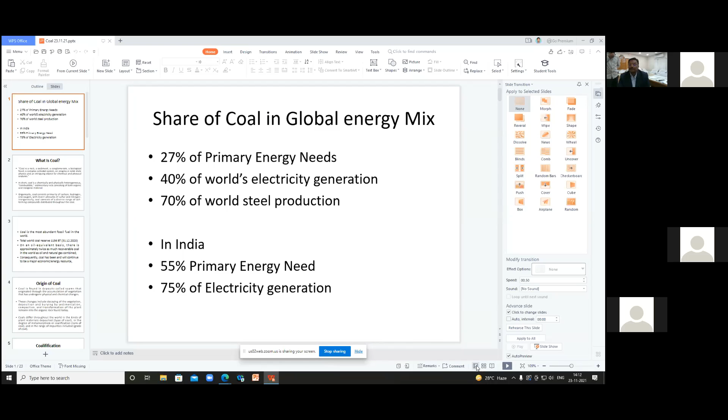With due apologies, am I audible and is the screen shared? Yes, sir, should I proceed now? Yes, sir. Shivang? Yes, sir. Okay, sir, it's taken a lot of time due to connectivity issues. Okay.

So we are to discuss in the next 1 hour regarding coal. Just a month ago, you might have heard in the national media that there was a scarcity or criticality in coal supplies, and many cities would go under blackout. Although that was not true, there was no crisis, but there was stock at the mines, not at the pithead power plants.

The main contribution for that was the rise in international coal prices, as well as the last 1.5 years of COVID-19 pandemic situation. Thermal power plants were not getting their due revenues, and they decided to maintain a lower stock position. Suddenly, when demand went up, the coal supplies from the mines to the pithead power plants took time until that gap was resolved.

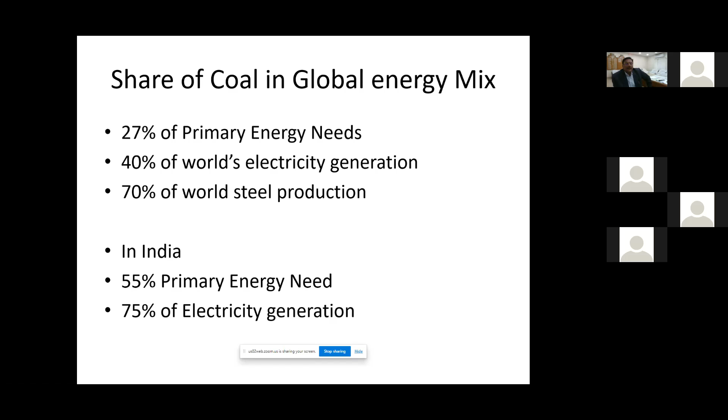If you see the Indian perspective, 55% of the primary energy need of the nation is met by coal, and the total thermal electricity generation share is about 75% of the total electricity generated in the country. And if I may add lignite to this, it accounts for around 79%.

Now, just a brief background about coal. Basically, it is a chemically and physically heterogeneous combustible sedimentary rock, found below the earth's crust, which we mine basically by two systems: underground mining or open cast mining. Organically, it consists of carbon, hydrogen, and oxygen, and very lesser amounts of sulfur and nitrogen.

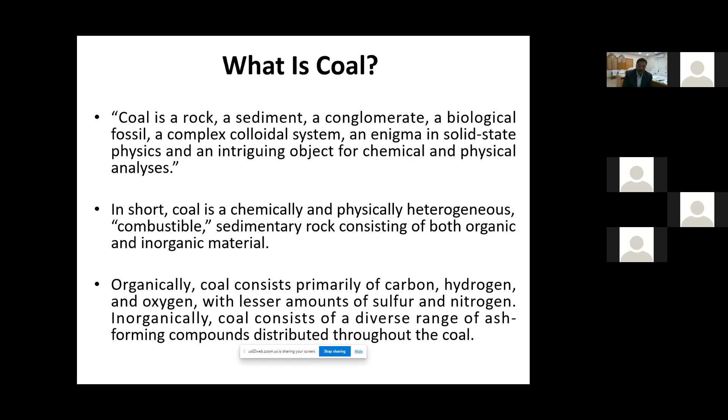It is the most abundant fossil fuel in the world, and the total world coal reserves as of 31st December is around 1156 billion tons, out of which 319 or 320 billion tons is the Indian coal reserve. On an oil equivalent basis, coal represents approximately twice as much recoverable energy in the world presently than oil and natural gas combined. So in perspective of the reserves available and its cost, coal has been and will continue to be a major economic and energy resource.

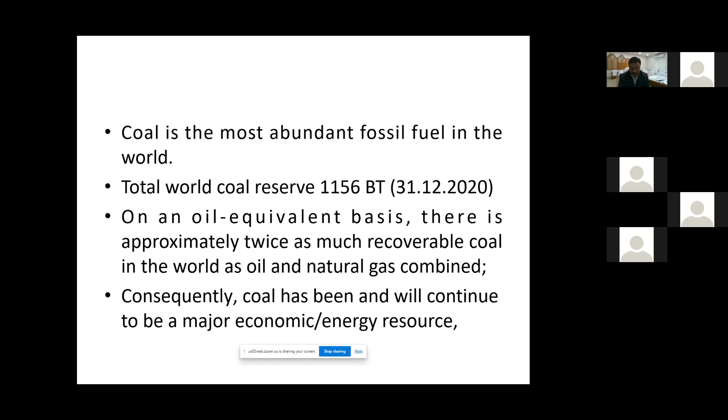As I said, it is found down deep below the earth's crust in the form of seams, which formed over a million years back due to decay of vegetation, and which has undergone physical and chemical changes. It differs throughout the world in kinds of plant materials which got deposited, and has been differently classified in different countries according to the rank of the coal and according to the range of impurities included, which we call the grade of coal.

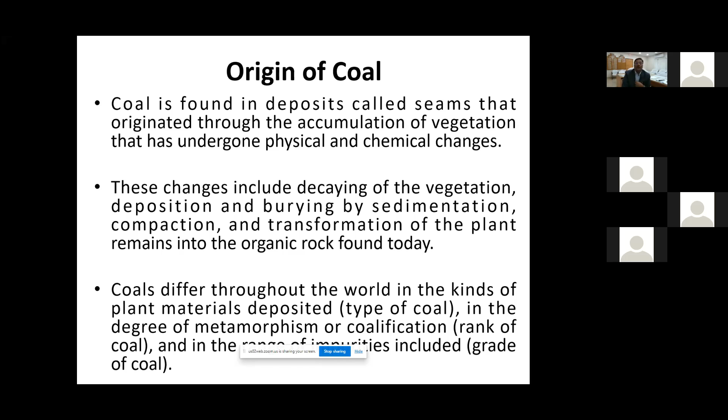The coalification process, in simple terms, is shown in this slide - the geochemical process that transforms plants into coal is called the coalification process. The initial step is in the form of peat. Over years, it gets converted into lignite, sub-bituminous, bituminous, and anthracite. Anthracite is the highest grade coal with higher percentage of carbon.

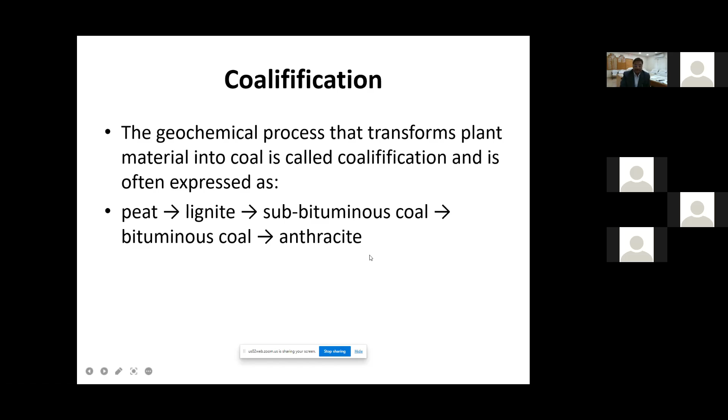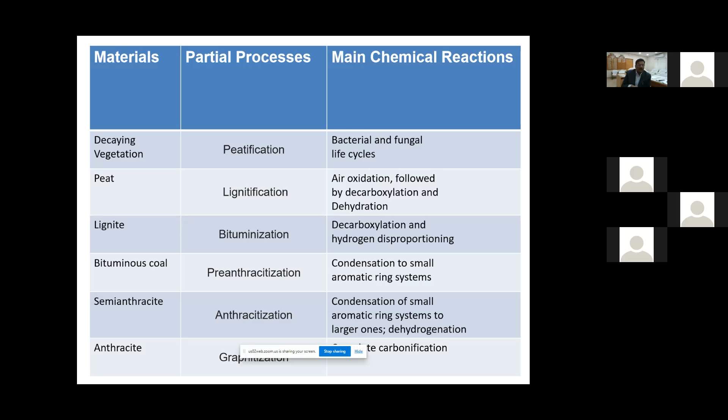This table shows the process of formation of high quality coal right from vegetation up to anthracite. The process name is there, and the main chemical reactions which the coal undergoes is shown in the third column. This is basically to know what you can expect as a byproduct or as flue gas in thermal power plants, or as a residual or slag in boilers - so just a brief idea so one can assimilate what we get in the flue gas or in the slag when we burn coal.

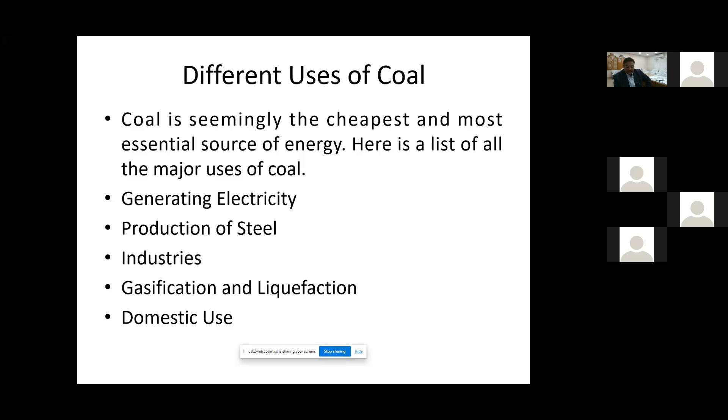What are the different uses of coal? Basically, world over, it is used in generating electricity, production of steel - coke plants world over are used for manufacturing of coke used in steel plants, industries which use it as a source of heat or energy like cement, fertilizers, etc., and in gasification and liquefaction, converting directly from solid to gaseous state. The syngas we use is normally a source of energy further, or liquids also. And in domestic use, over the years, it has gone down, but previously it used to hold a major share.

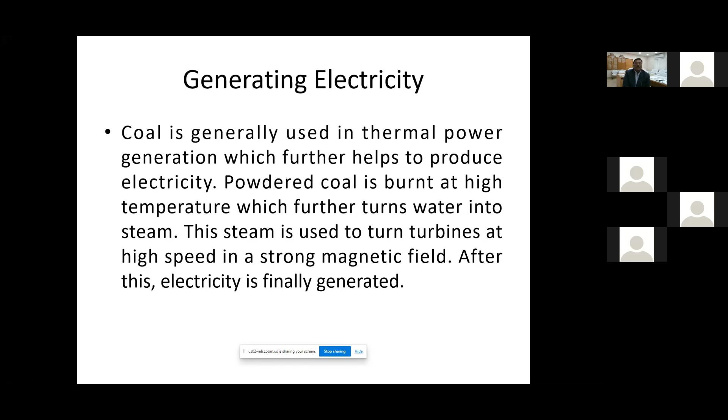Generating electricity, in simple words, is used in thermal power generation which helps produce electricity. It is burnt at high temperature, which turns water into steam, and this steam is used to rotate the turbines at high speeds in a strong magnetic field - just a basic idea of how coal gets converted into electricity.

For production of steel, coal is used indirectly to make steel. The coal is baked in furnaces, which we call coke oven plants. Once this is formed, manufacturers use coal coke to smelt iron ore into iron and make steel.

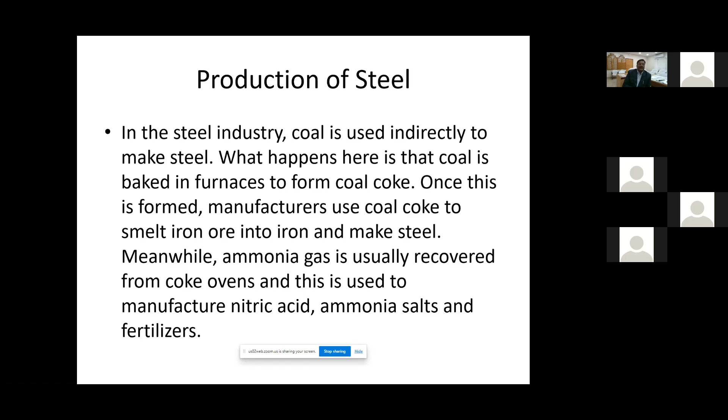Other industries are cement, paper, aluminum, chemical, and pharma industry. Coal provides numerous raw materials like benzol, coal tar, sulfate of ammonia, creosote, etc. to the chemical industries, and it is mostly used as a source of energy in most of the industries.

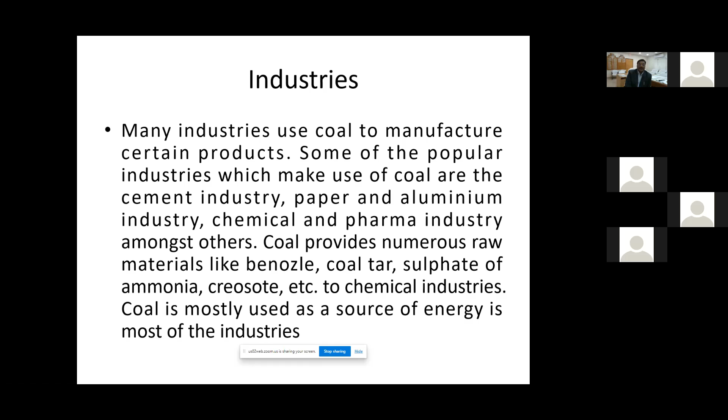Gasification and liquefaction are two of the main processes in view of greenhouse gas effects, for a cleaner technology. India and world over, people are turning to gasification and liquefaction, but the energy conversion ratio is still not very encouraging, and many of these plants or products we get are commercially not viable - that's why it has not taken off on a large scale. R&D is still going on, and maybe in future, gasification and liquefaction of coal may be the main technology for use.

As you can see here, it is turned into synthetic gas, which is a mixture of carbon monoxide and hydrogen. These gases are then an intermediate product, which can be further converted into different products like urea, methanol, pure hydrogen, and more.

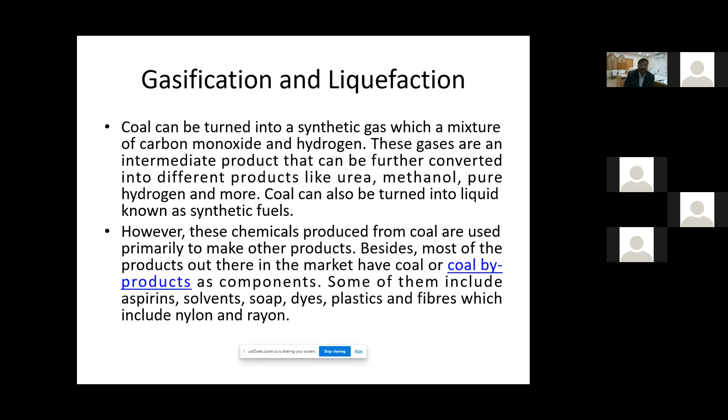However, these chemicals produced from coal are used primarily to make other products. Besides, most of the products out there in the market have coal or coal byproducts as components, and some of them include aspirins, solvents, soap, dyes, plastics, fibers, etc. It also has a role in specialized products such as activated carbons, carbon fiber, and silicon metals.

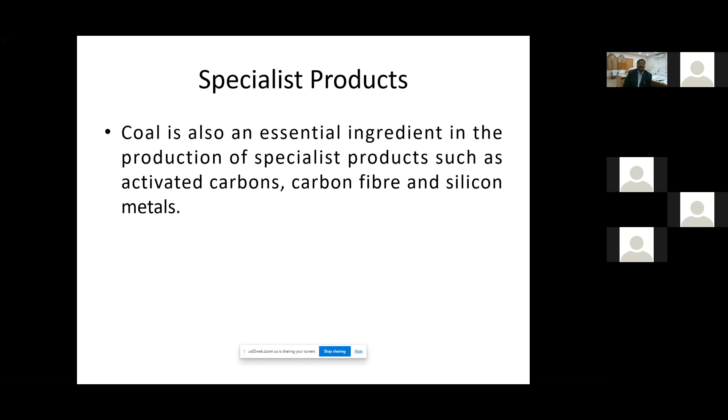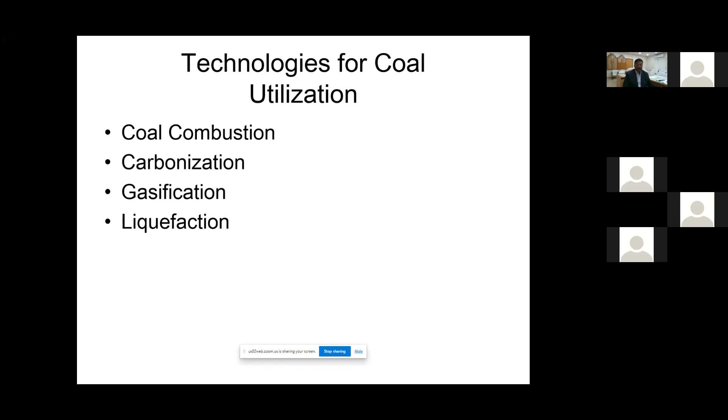The main technologies used for coal utilization are classified into four: coal combustion, carbonization, gasification, and liquefaction. Burning coal to generate heat is the most straightforward way of using coal. The chemistry of coal combustion, as it's known, is that it can be burnt in a large fixed bed or on a grate, as smaller crushed pieces in a fluidized bed, or as very fine particles in suspension.

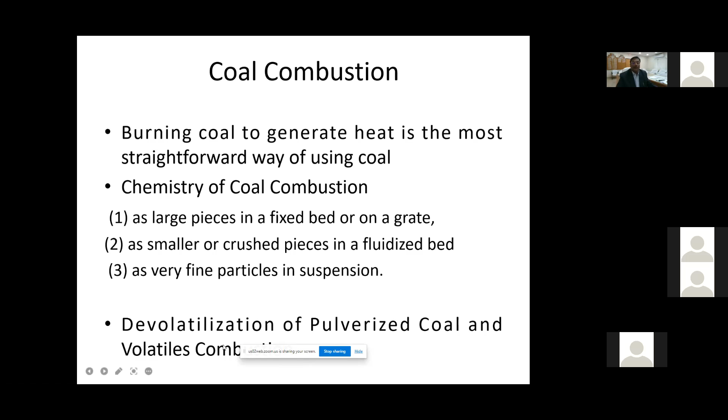In the order, the pulverized coal at furnace temperatures has shown that the porous char density changes. You can have different density of char at different temperatures, so you can use it as per your requirement.

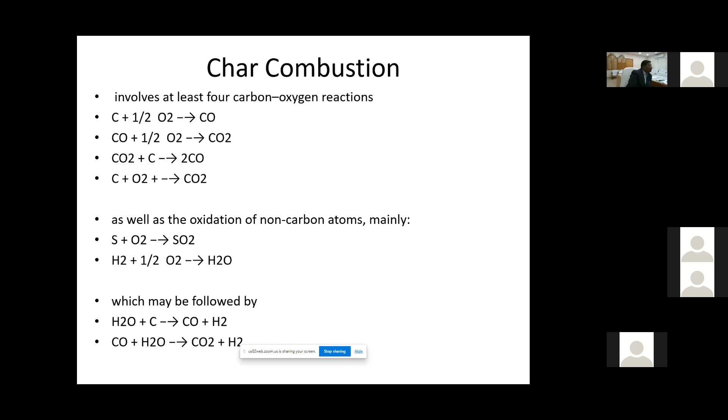The coal combustion systems are basically classified into three types: the overfeed, the underfeed, and the crossfeed. This is the manner in which coal is burned, and the devices in which it is burned are primarily determined by the desired size or capacity and the coal type and quality.

The combustion methods are mostly fixed bed or fluidized bed, and suspension firing are a few which we will discuss in the coming up slides.

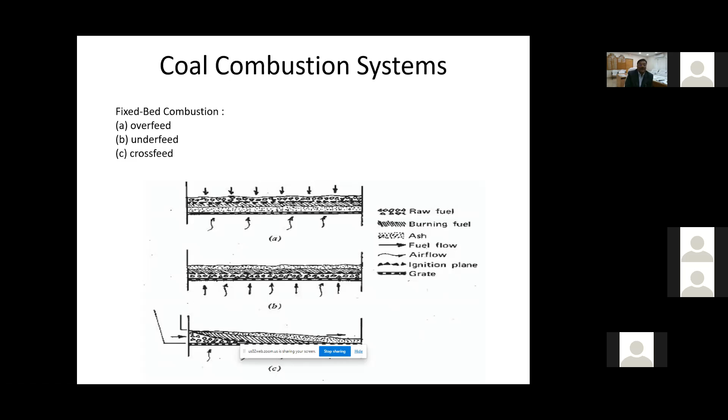This method covers a wide variety of applications, including domestic heaters which we used earlier, underground gasification, and industrial stokers, which use fixed bed combustion.

The fluidized bed combustion later on became a technology for combustion of all fossil fuels and other fuels because of the several inherent advantages it had over the conventional combustion systems, which we earlier discussed.

These advantages included fuel flexibility, the input which you could provide, and low NOx emissions. You also had control over the SO2 emissions. So this later on developed into fluidized bed combustion.

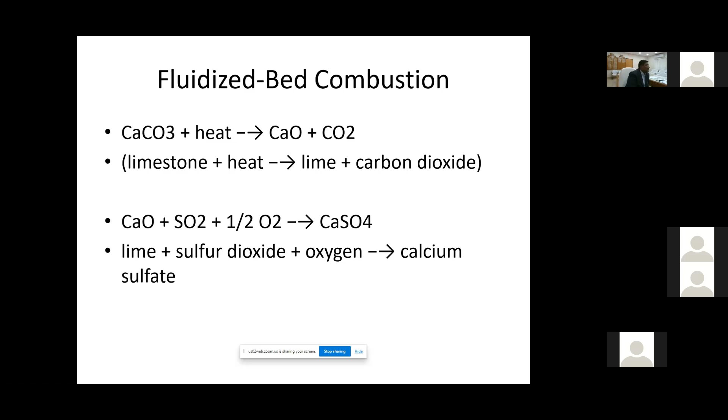Coming on to the next method, suspension firing - either it is dry bottom firing, wet bottom firing, or cyclone furnaces.

The pulverized coal is injected into the boilers, where the stokers can accommodate virtually any coal with proper design provisions. You can pulverize any quality of coal.

The coal size distribution for pulverized coal fired units is less than approximately 2% by weight greater than 50 mesh size. The size of the pulverized coal, to give you an idea, is less than 50 mesh size, with 65 to 70% less than 200 mesh size.

After the coal is pulverized, it is pneumatically transported to the burners, in the air flow or compressed air, using a portion of the combustion air - approximately 10% of the total combustion air - in a manner that permits stable ignition.

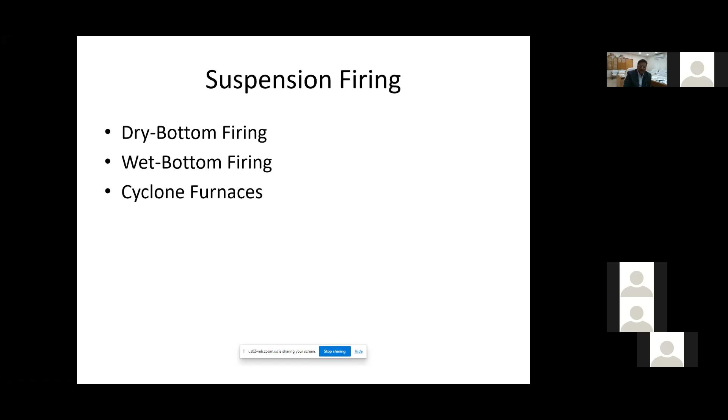Coming on to carbonization - it is the process by which coal is heated and volatile products, whether gaseous or liquid, are driven off, leaving a solid residue called char or coke.

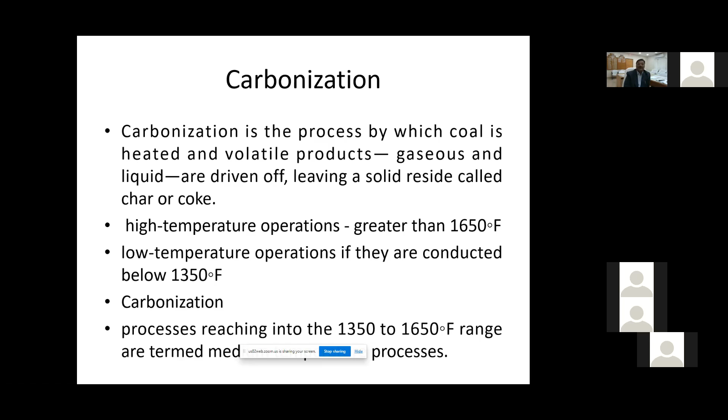It is basically divided into high temperature operations, carried out at a temperature more than 1650°F, and low temperature operations if conducted below 1350°F, with operations between 1350 and 1650°F termed medium temperature operations.

Gasification, as we discussed earlier, that...

Am I audible? Hello? Yeah, you are audible. Shivangi, am I audible now? I'm not getting feedback. Yes, sir, you are audible.

So gasification mostly deals with the process to upgrade solid coal. It is difficult because transporting coal long distances to get a result, so if we can remove the undesirable impurities within the coal and convert it into a gaseous form, it can be purified and used directly as a fuel, or further reacted to produce other gaseous or liquid fuels or even chemicals.

There are many reasons in the interest of gasification for utilizing coal. Mostly, carbonization of coal to produce coal gas is a relatively simple process, as we discussed in the carbonization process. It is done in a retort in the absence of air.

Coming on to liquefaction, it is the conversion of coal into liquid products. Mostly it is categorized into three methods: pyrolysis, indirect liquefaction, and direct liquefaction.

In indirect liquefaction, it is known as Fischer-Tropsch synthesis. It is the conversion of carbon monoxide and hydrogen to liquid hydrocarbons and related oxygenated compounds. The Fischer-Tropsch synthesis provides almost all hydrocarbons conventionally obtained from petroleum.

But the energy conversion efficiency in oil or petroleum is much more than what we get from liquefaction of coal. That's why it has an upper hand. The actual product mix depends on the temperature, pressure, the CO/H2 ratio, and the catalyst used during this whole process.

Medium pressure synthesis, if conducted at around 640 degrees Fahrenheit, also yields mainly gasoline, diesel oils, or heavier paraffins.

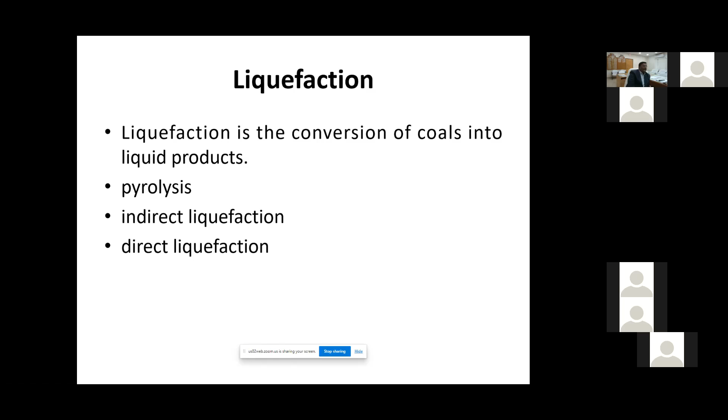You have the H-coal process, where pulverized coal is slurried with recycled oil and hydrogen, fed to a bubbling bed reactor, a feature that distinguishes this process from others. That's why it is named the H-coal process.

Reactor conditions are normally in the range of 870 degrees Fahrenheit, and the reactor contains a bed of catalytic particles, mostly cobalt, molybdate, or aluminum oxide.

This is a recent technology observed in the 1990s when it changed its name to Hydrocarbon Technologies. The H-coal process has been modified into a process known as HTI, the direct coal liquefaction process.

So the indirect and direct liquefaction processes have been discussed, and these have not been taken up on a large commercial scale. In the years to come, these technologies, which are under pilot projects and in many parts under R&D, have a chance of taking up commercially.

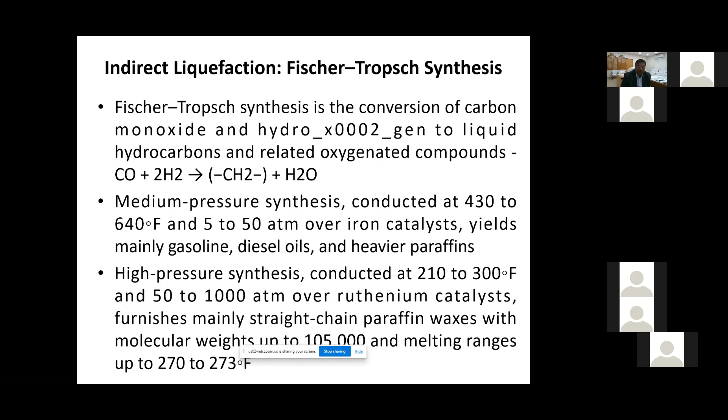Apart from power generation and the steel industry, these are the areas where coal can contribute in the coming years. So with this, I come to the end of the presentation.

Thank you. Shivangi, am I okay now? If any discussion is required regarding coal or its future prospects, or even the mining part of it, I'll be happy to discuss.